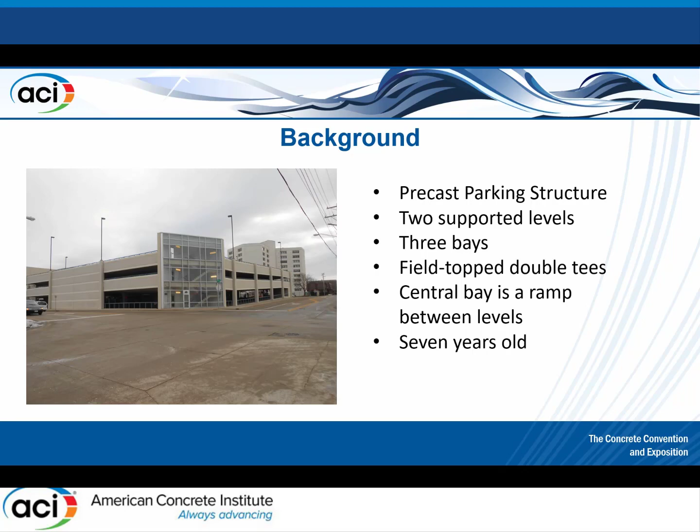So really the way this started: there's this precast parking structure, not a huge structure, 2 supported levels, 3 bays wide, about 150 to 200 cars, so not a big structure. Constructed with field-topped double T's, central bay is the ramp. It's about 7 years old. There's really nothing remarkable — you see thousands of these across the country. It was in Illinois, so subjected to fairly significant environmental conditions, but being only 7 years old, they weren't expecting any deterioration from chlorides or corrosion or that kind of thing at this point.

But here's an overall picture, kind of a plan of what it looks like, and a picture looking up one of the ramps. Again, nothing remarkable about it — you see thousands of these being built everywhere.

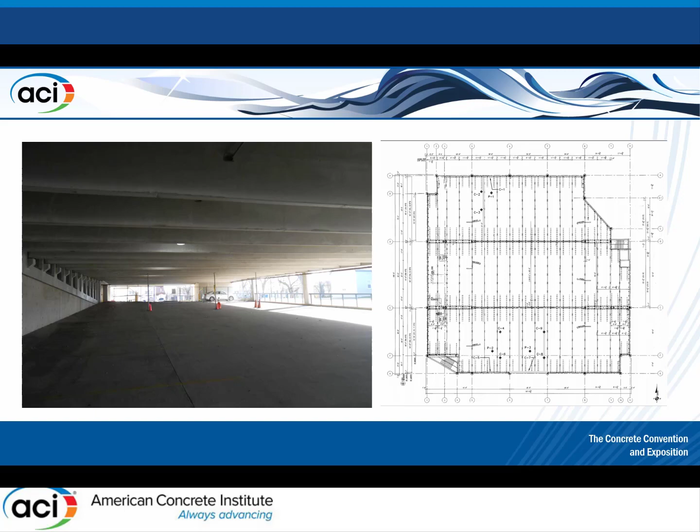But one day, what happened — someone was walking along and saw this crack. They didn't have the shoring at this time. It was just a crack that developed in the middle of one of the double T stems, and it was a fairly severe crack. It varied in dimension over its height, but the base of the crack was about 3/8 of an inch wide. That's not one you'd normally expect, particularly in a pre-stressed double T.

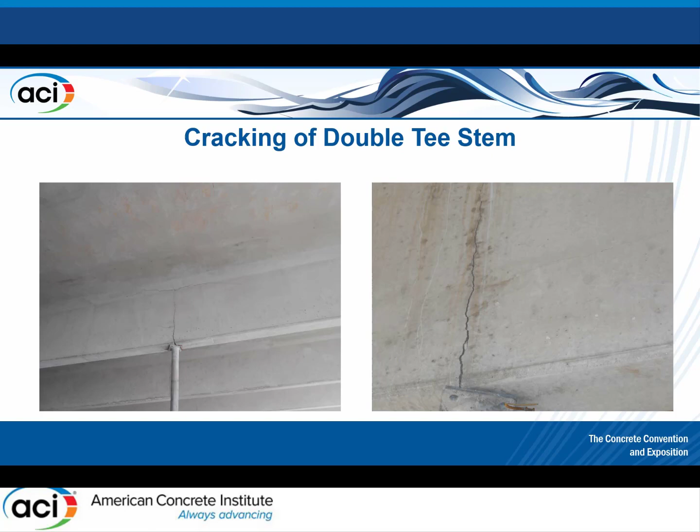So the owner was like, what's going on? We need to figure this out. And that's when they started calling us in to have a look at it and really work through the assessment. And this is the procedure.

I think Ashok threw this chart around — this is the procedure outlined in the 364.1 document for doing assessment. It's got a lot of things in there, a lot of iterations and things going back and forth. But what I really like about this document, and what I think is one of its strengths, is that it outlines a number of steps you need to go through and think about when you put together your assessment plan, when you're talking to your client and figuring out what you're going to do.

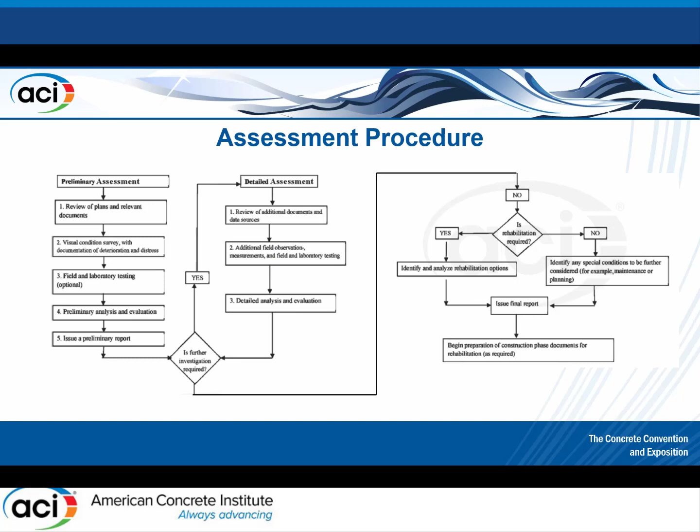So there's a lot of iterations here, a lot of small different text, so in my mind I almost want to break it down into 5 different parts. I'm going to talk about them linearly, as if you do one and then the other, but in reality it becomes an iterative process — you figure something out and go, oh, I need to check this, or based on this information, I need to go back to the plans and look into that. So I want to talk about it as if everything happened in sequence, but realize that's an oversimplification. If you think about these 5 things and run them through in your mind, that helps you do a complete assessment.

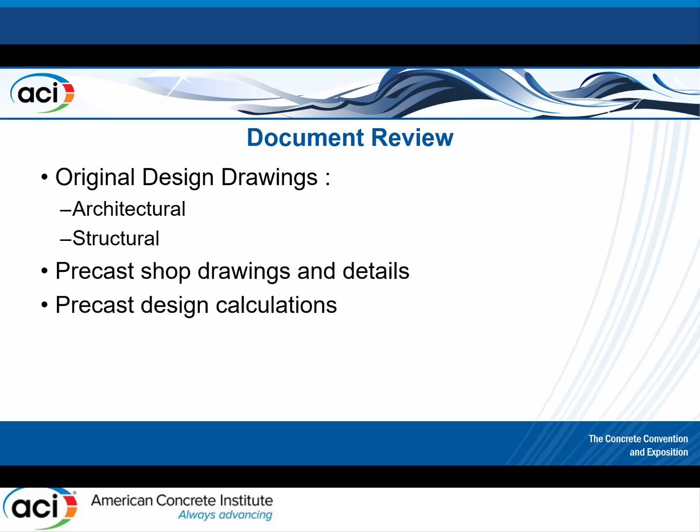So the first thing I'm going to talk about is document review. This is a precast parking garage, only about 7 years old. The owner had fairly good documentation of what was going on, which isn't always the case. You can't always get design drawings or shop drawings, but we were able to get all of this information - architectural drawings, structural drawings, precast shop drawings and details, as well as the design calculations. So we had a fairly good set of information to start with to try to figure out what was developing.

One of the key things we did that was very useful in the review was comparing the calculations to the shop drawings. We looked at the loads - yes, the loads are correct, they did design them for the right loads. We compared the drawing requirements on the structural drawings to what was done in the calculations by the precaster, and yes, that looked okay. We looked at the span, the depth, the width requirements - they all kind of met. So the calculations seemed to be pretty fine for what we were doing, and they made sense with what the structural drawings were requiring.

We had a really great advantage - we were able to get piece drawings for each member and compare those drawings to the calculations. Overall dimensions agreed with what was shown on the structural drawing. Concrete strength called out in the calculations matched what was on the structural drawings, and what was used by the structural engineer for the precaster matched what was called out on the precast shop drawings. Number of tendons that the calculations were showing also agreed.

But then we hit this thing, and it was kind of interesting - our eureka moment when we came across this. The calculations were using 0.6 diameter tendons, while the shop drawings were using 0.5 diameter tendons. That's a little bit different - you can't use a smaller tendon for a bigger tendon and expect it to act the same way. What's 0.1 of an inch? Well, if you do the math and look at the relative size, the 0.5 tendons are 83% of the size of the 0.6 diameter tendons. So, oversimplification, but you're at 83% of what the strength is supposed to be.

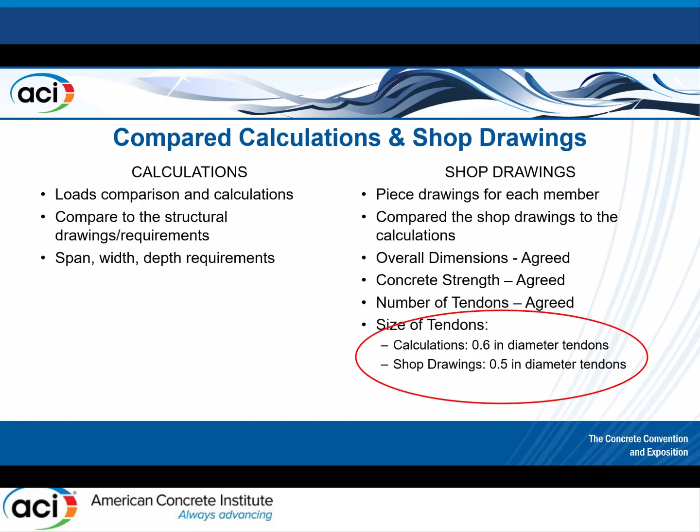So right in the shop drawing phase, in the initial document review phase, we found something that said, hey, this is something we need to look into further. Which is nice - you don't always see that, usually it takes a lot more to get there. But that wasn't the end of the issue. We had the shop drawings and the calculations, but we needed to know how that relates to the behavior of the structure. So we still did the field investigation, testing, and all that.

Talking about the field investigation - one of the most important things, we're dealing with cracks. We need to document the nature of the cracks. So we documented the primary crack, the one that kind of started this whole flaring issue. We figured out where it was on the double T, documented its width and how that changed with height, how high it was, and if it was different from one side to the other - trying to understand this crack that's causing everything to happen. We need to know as much as we can, so doing that type of in-depth documentation on this one crack was very important.

But we didn't stop there in terms of the assessment of the structure. There's something else going on elsewhere that we should be seeing - if we go back to our cause, if we have 0.5 versus 0.6 diameter tendons, why is it only happening in this one T? Or is it something more widespread?

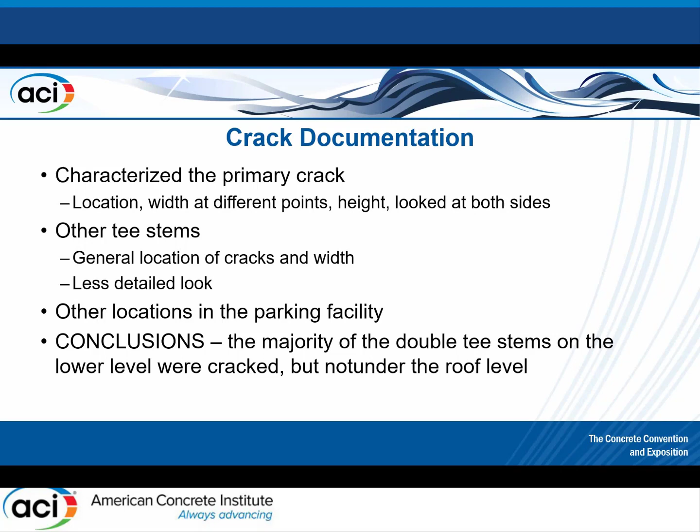If the shop drawings were showing one thing, then we think it to be widespread. So we did a visual exam of basically the rest of the structure, and we documented what we saw, and we were able to find other cracks. It's always a challenge showing pictures of cracks in a presentation, but they did have hairline cracking of the other T stems, and the nature was different from this primary crack. Instead of one big crack, there were a lot of smaller cracks spread along the length of the stem, which was good information to know that this may not be just this one T stem, but something more widely spread.

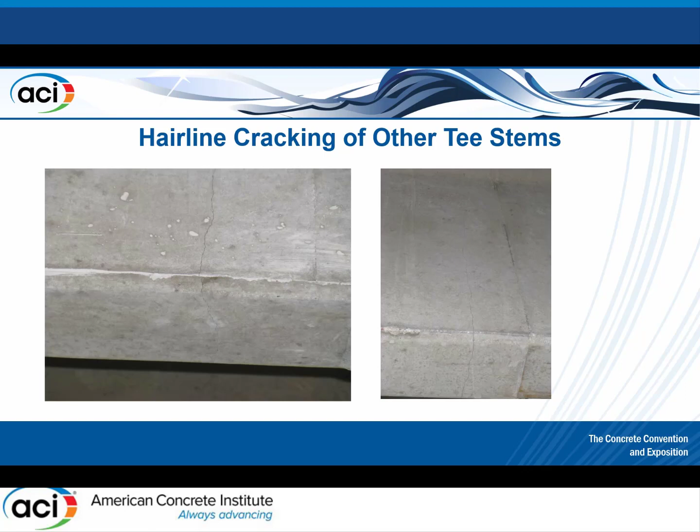As part of the investigation, because we knew the size of the tendons was potentially part of the problem, we did an opening and exposed one of the tendons. We were able to visually confirm that they used half-inch diameter tendons. This wasn't something caught somewhere along the line, so we went down this rabbit hole - they may have said 0.5 in their precast shop drawings, but used 0.6. No, we were able to expose a tendon and confirm what we found in the shop drawings, that 0.5 inch diameter tendons were being used. That's one of the things you really should be doing - take all this information and relate it one into the other.

So our shop drawing review, our document review, informed what we did in the field investigation. Once we found that out, we included in our field investigation looking at what the size of the tendons were.

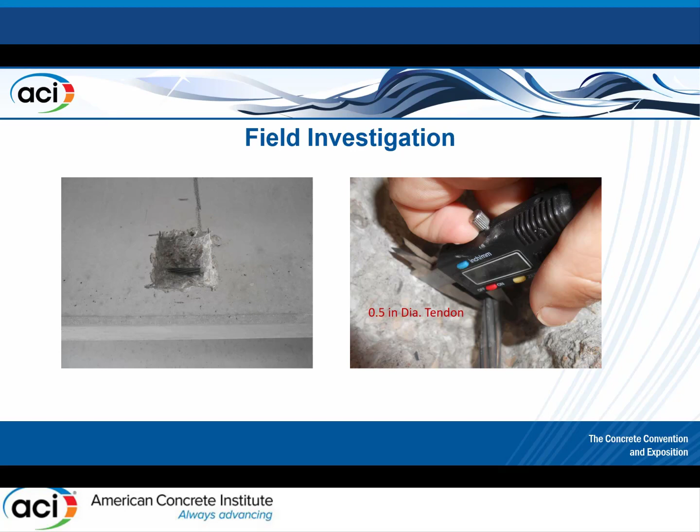We did a bunch of other field work too, not as relevant, so I'm not going to get into it. We did a visual review of the rest of the structure, made sure nothing else was going on. We did some chain dragging to make sure we weren't having widespread delamination or deterioration. We confirmed some dimensions of the structure, of the members, that they all seemed to work out. And we did examine the tee-to-tee connections. We did a bunch of other stuff as well.

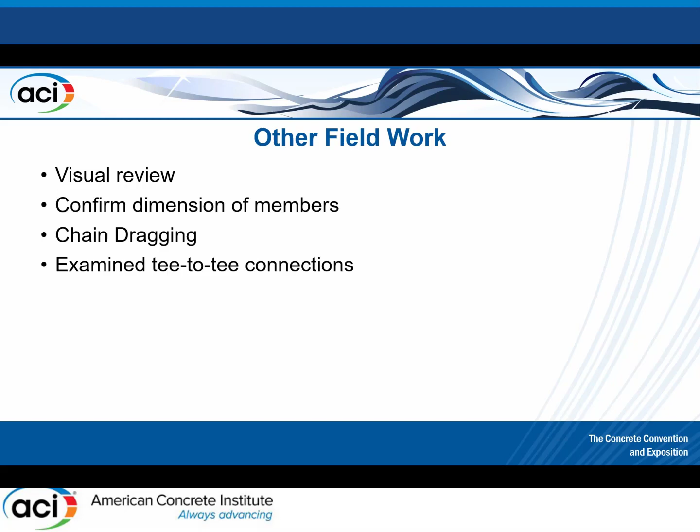Remember, this is only a half-hour presentation, you're getting the highlights. But why I wanted to bring this up was because you don't want to get blinders on, find something and go down that rabbit hole and assume you know the answer. We want to make sure we have enough information to confirm that it's not anything else going on - in this case it was fairly straightforward, but more often than not you have a lot of different things going on, and that's what's causing your issues.

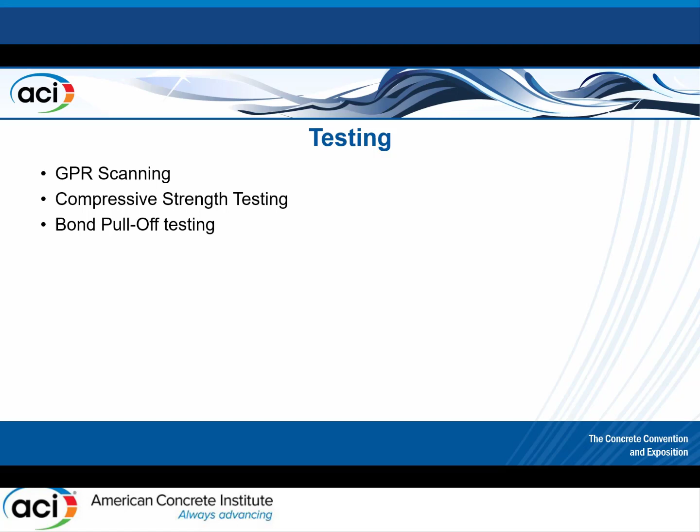After we did our field investigation - well, time-wise, kind of simultaneously - we also did some testing. We didn't do all the tests that Ben talked about; we really focused on these three. These are more related to the structural condition, because we weren't worried about deterioration at that point. We didn't see anything, didn't find any significant delamination, didn't see a lot of corrosion and so forth. So we were really focused on these three tests.

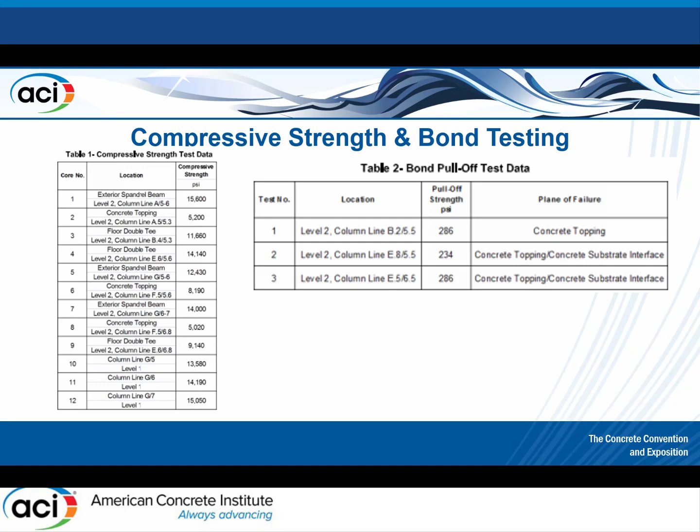Compressive strength testing wasn't super exciting - it found that yes, it was what it's supposed to be, so it's not really a concrete strength issue. Not super exciting, but good to know. Bond pull-off test - since it was a field topped system with a concrete overlay over the top of all the double T's, we found that yes, it was generally well adhered, so that wasn't really an issue. But GPR was the one that was most important for what we found, and that helped us confirm that they didn't do something like use half-inch diameter tendons but use more of them to make it up.

They did match what we found, the dimensions and the locations of the steel and the tendons, and how it was laid out matched what were the shop drawings. GPR doesn't tell you the size of the tendons, which is why we had to do the opening, but it was able to confirm that, except for this potential issue with tendon size, it did match what was going on and what was expected. That was very useful in its way.

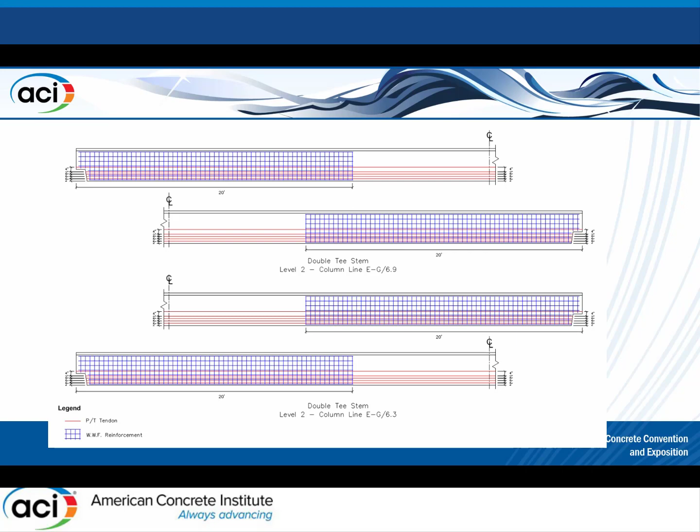So this is just the layout from the GPR. So after this, we go to the evaluation, which is kind of pulling everything together.

We take all the information we found and primarily looked at it as a structural evaluation. We went back and didn't just rely on what the structural engineer was calling out as the required load requirements. We checked them to make sure they agreed with the code requirements. Very simple, fairly basic, but an important first step.

And then we took that and calculated what were the applied loads, what should they be resisting, what should they design for, kind of separate from what was called out and what was done by the precast design engineer based on the requirements.

And then we calculated the capacities. Based on our knowledge that there were 2 tendon sizes potentially being used or considered, we ran the numbers both with 0.6 diameter tendons and 0.5 diameter tendons, and what we found was we agreed with the precast engineer who did the calculations that 0.6 inch strands were fine. They met the code requirement factors of safety.

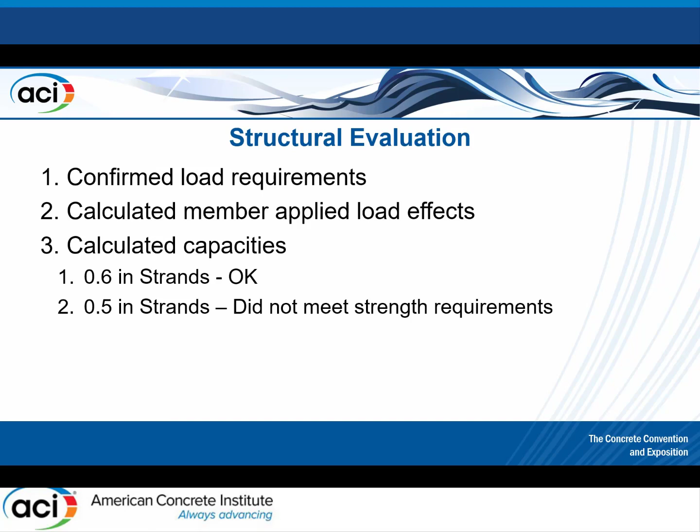The 0.5 inch diameter tendons did not meet those requirements. Not surprising - smaller tendons aren't strong enough. You wouldn't have used 0.6 if you didn't need them. So that all fit together, and then we were able to take our results and do reporting.

And I'm not going to talk about the report itself - a report is just a bunch of pieces of paper - but that was an important step in communicating it to the owner.

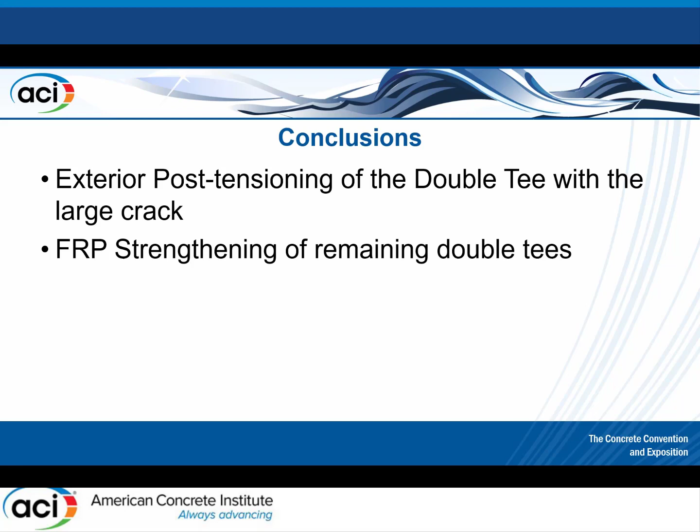Just to conclude, we had an exterior post-tension double T, FRP strengthening. So what we ended up doing: we took that one with the double T and did exterior post-tensioning, and then we did FRP strengthening of the remaining double Ts that had all those cracks. And since I'm an engineer and I like these, even though it's nothing to do with the assessment, I do have some pictures of the repairs, so I have a couple minutes to quickly run through them.

This is a couple of pictures of the repairs of the exterior post-tension, you can kind of see - it takes a little bit. You've got the bars to make it continuous, you can't see them well here, but you can see there are a number of bars kind of making it composite.

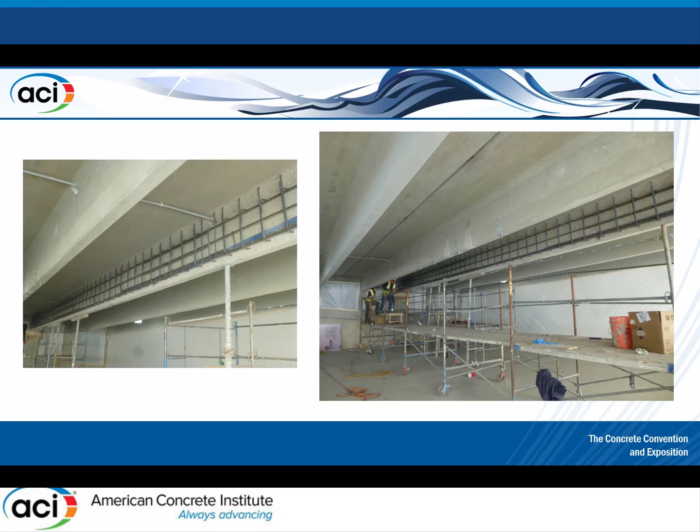There are - I don't know how well you can see those, you'll see them a little better in the next picture - but there are tendons, draped tendons that run one from the other. This is another picture, maybe a little better, showing where the tendons are located, trying to really restore it.

The way we worked this was we weren't going to rely on the original tendons any longer, because of the width of the crack and the deflections we saw. So after we shored the double T, we cut the original tendons to make sure they weren't doing anything, because we didn't want too much uplift when we added our exterior post-tensioning. We went in and redesigned everything so that the post-tensioning would take care of the load, basically replacing the tendons. Because of the exterior post-tension, instead of straight ones we did draped ones and a few things like that - that's kind of where we ended up.

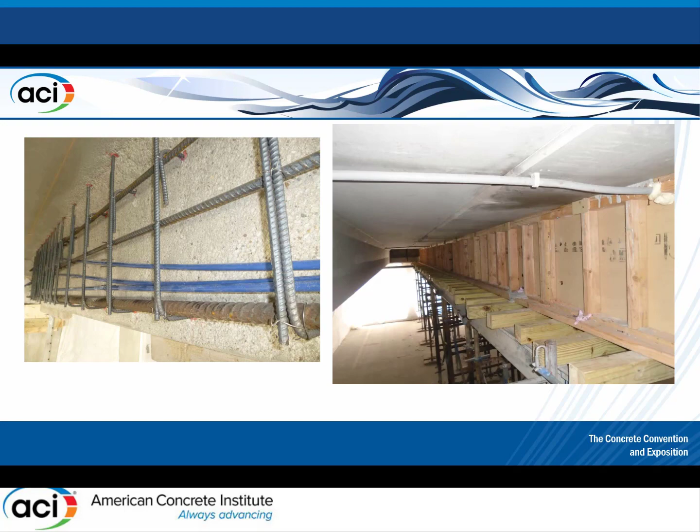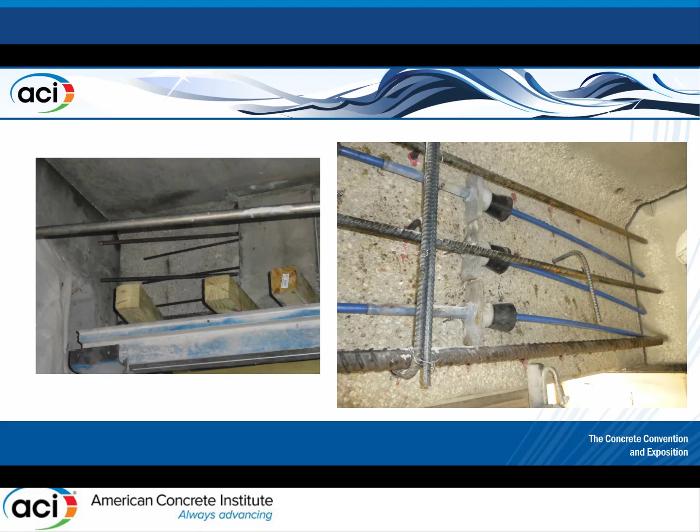So you can see the tendons, you see the formwork. Here's a picture - on the right is for the concrete placement, the left is how they're placed. We left a little bit at the end to allow us to stress them, then poured the concrete, stressed them, and this is what it looks like at the end.

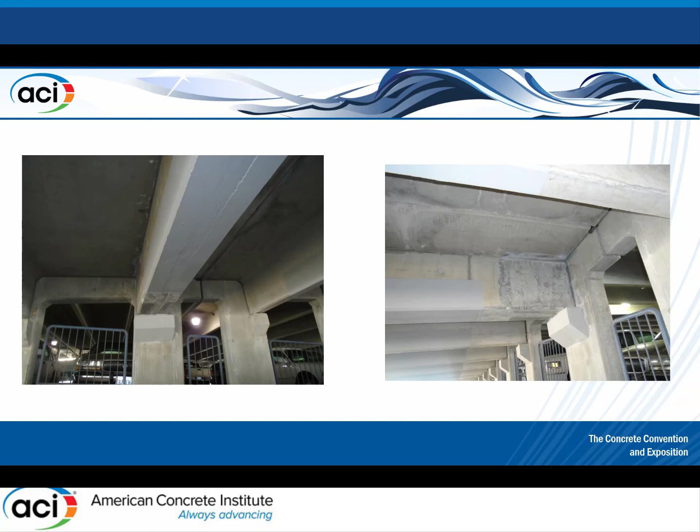You can kind of see the second pour to encapsulate the tendons, and what we ended up with was a wider double-T stem at the end. So that's what we did for the main one.

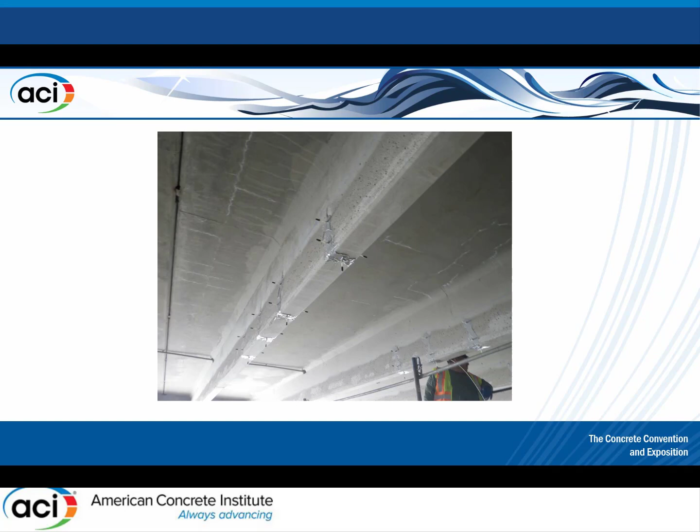Running through real quick, here's all the other ones. The first step was injecting the cracks, repairing them to make sure they won't be an ongoing issue, and then adding FRP. As you can see, it was basically every T-stem that needed the FRP added, so there's a fair amount of it.

On the right, we did confirmation quality control testing, taking samples from the end of the FRP and doing bond pull-off testing to make sure the prep and application were fine and confirm it worked. We wanted those samples located at the end so it wouldn't affect the main strength of the FRP.

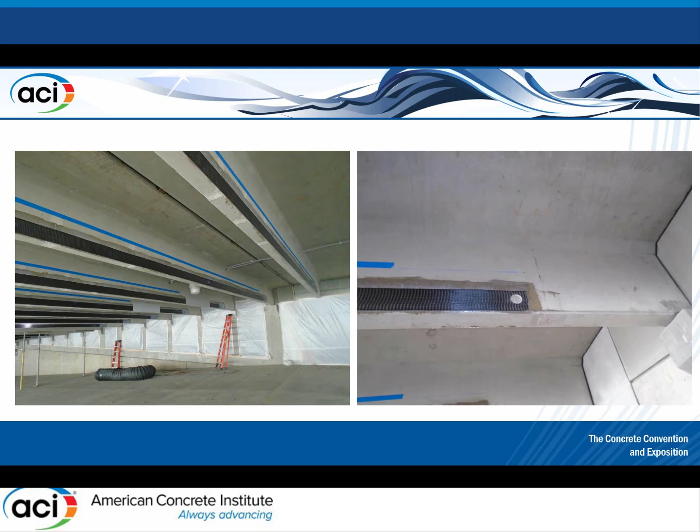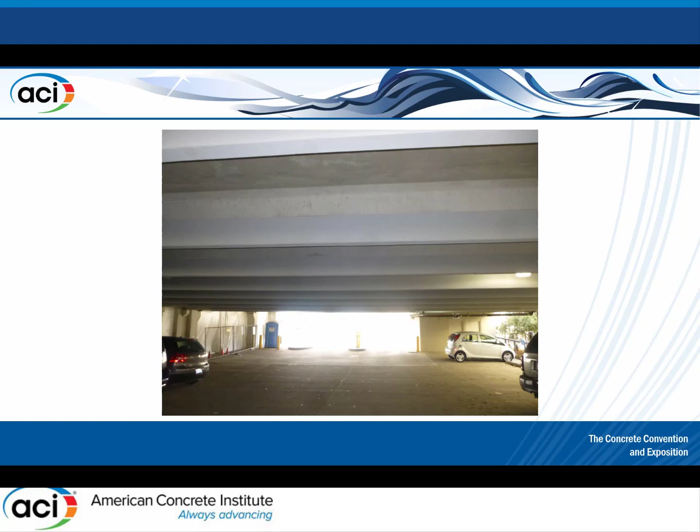And to make everything hidden, we coated it all so you don't walk in there and see those big black ugly FRP systems. I know some people love it - if you're an FRP manufacturer it's music to your ears - but most people want to hide what the FRP looks like.

Thank you very much.

Any questions? You have a few minutes for questions. Let me pull this over for you. Sure. Yes. My question is, given the load and resistance factors that are used in design...

What was your conclusion as to the cause of the cracks? Was it simple overstraining in the tendons? Yes, when we ran through our calculations, it was definitely over the cracking threshold, even including the pre-stress force that was there. So it was in that intermediate range, and that's definitely a concern, particularly for parking structures.

Once you start cracking - these structures are designed specifically to be crack-free to avoid durability issues down the line - we wanted to address that, but it also just didn't meet the code required factors of safety. But from an assessment viewpoint, it was in that range: below the ultimate capacity, but above the cracking load of the structure.